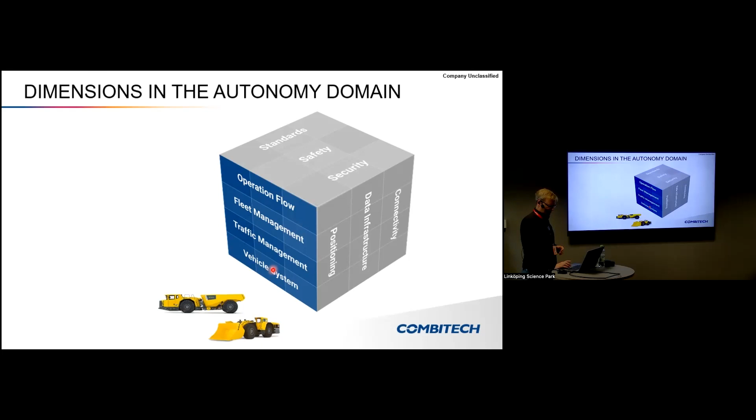And then we have our part. We have been working with the fleet management and traffic management parts, and also to some extent the integration towards the Epiroc safety system, because having those autonomous machines working in a confined area, you need to have a safety system. And Epiroc wanted to give the operators the possibility to easily access the safety system and flexibly change the safety areas where autonomous things can happen.

Between the two systems, the vehicle system and the traffic management system, we have been working with an interface called OPC UA, which is a standardized framework, and Epiroc used the OPC UA framework and defined their interface on top of it. And we did not stop there. We also integrated towards mine infrastructure. For example, if certain areas are not allowed for autonomous machines to enter, like at the crusher if the bin towards the crusher is full, or if a rock breaker is out of parking position and the autonomous machine would damage the rock breaker, then we stop this from happening.

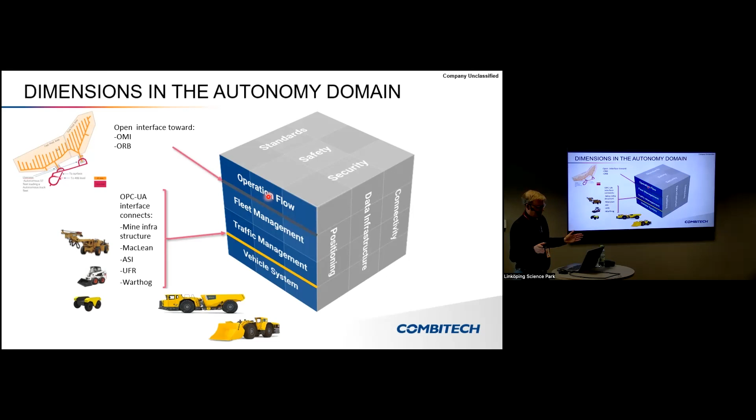And then, of course, we have the integration towards some kind of operational flow or orchestrator of the complete mine. This is mainly controlled by geologists, how the ore body shall be worked on, so that it collapses in a certain, safe way. And here we have had two examples. We have the OMI, Open Mine Integrator, that was a cooperation with LKAB. I will come to that a little bit more. And we have ORB, optimized real-time bogging. This system helps the geologists to let the ore body collapse in a safe way. I will talk a little bit more around that.

So, but that was only one side of the cube then. We see also that we really need to drive standardization in this industry, because it would help the mine operators to have different vendors cooperating in the mine and have them competing with each other also.

Safety, of course, is a big thing in mining, and as I said before, we are still working in confined areas where the autonomous machines are allowed to work, and that helps to not have any dangerous interactions with humans. And it's an important business, so security, of course, plays a role there as well.

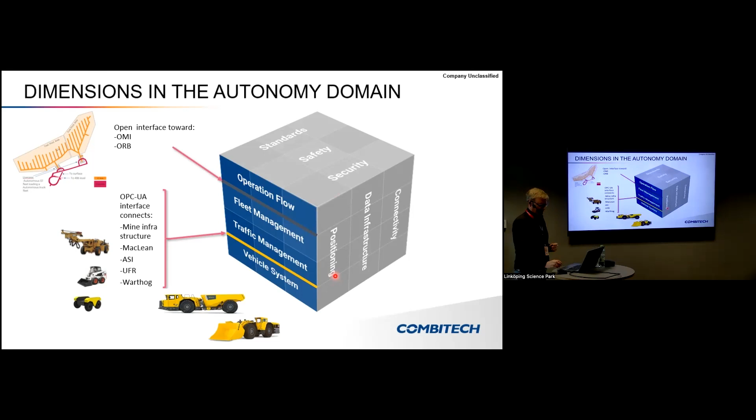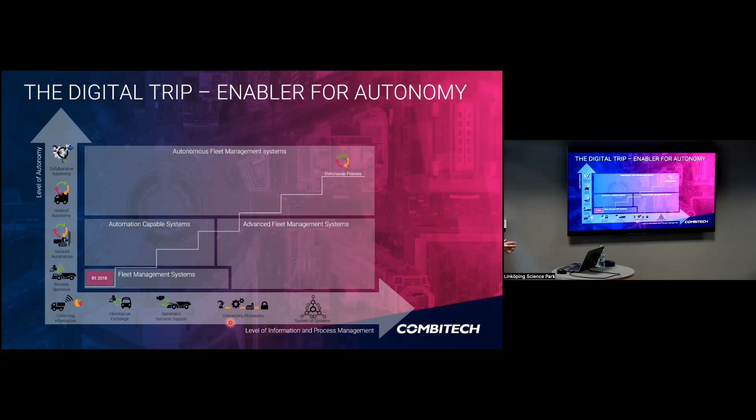So we started off with just two extraction drives for the loaders, very similar to the POC which we did before. And then we went along towards doing it for the complete mine. I will show you the picture later on and also give the demo about it. And that continued for some years. We also integrated, as I mentioned before, the Epiroc safety system to make it flexible how you divide your work area into smaller autonomous areas.

And now we are in the third release of our system, and we approach the situations where we now have interactions between the scooptram, the loader, and the mine truck. So, yeah, we are touching here the autonomous fleet management system.

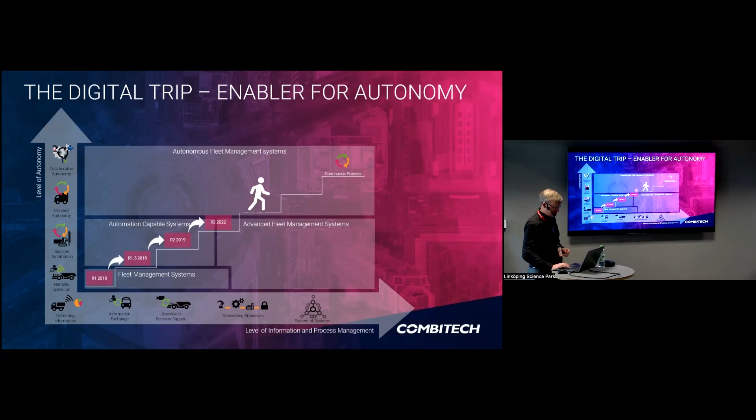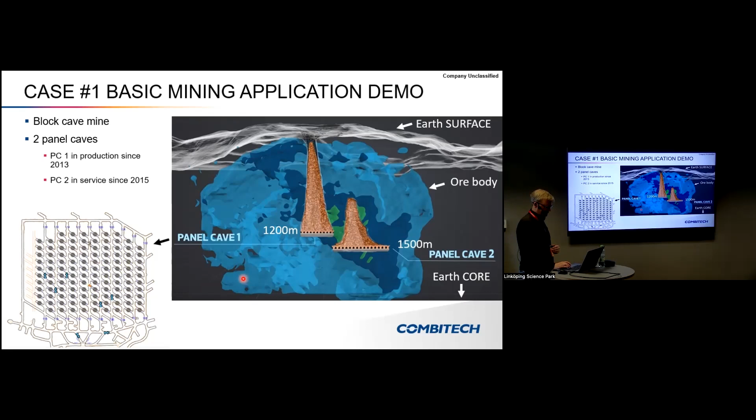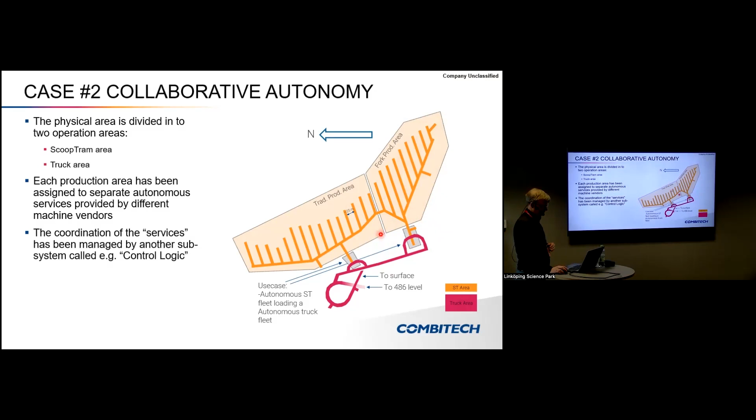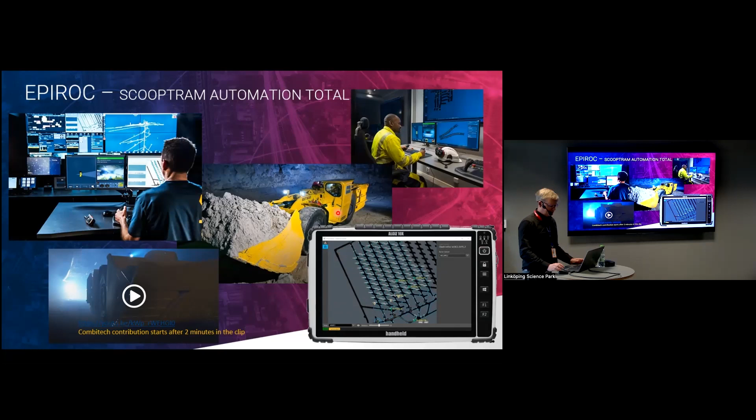Good, and now I would like to continue to the demo. Let's take a look at our application, which we have been working with for about 4 or 5 years now.

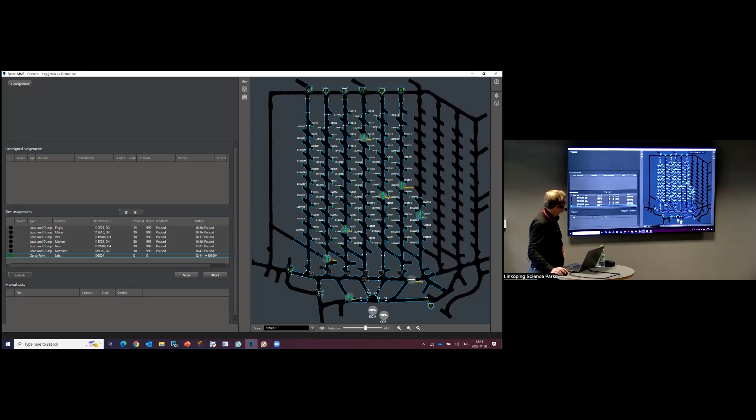What can you see here? On the left-hand side we have the assignment flow. You can create assignments - for example, I can choose Layla here to go to a point. Then I get a create assignment panel with information about the assignment up here. I can choose a destination, create the assignment, and launch it. Here you see Layla is moving, and the orange colored part of the route means the vehicle got access to that part of the route.

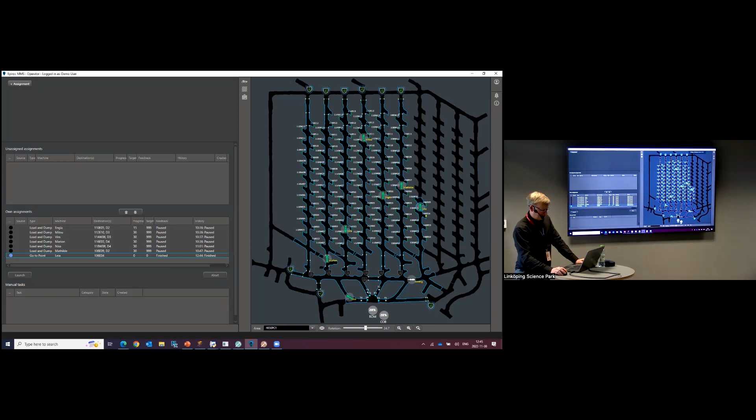In general I have ST18s here, which means they are supposed to take 18 tons into this bucket. I also have a rock breaker, ST14 rock breaker. I will use this vehicle to interfere with the autonomous movements of the machine later on.

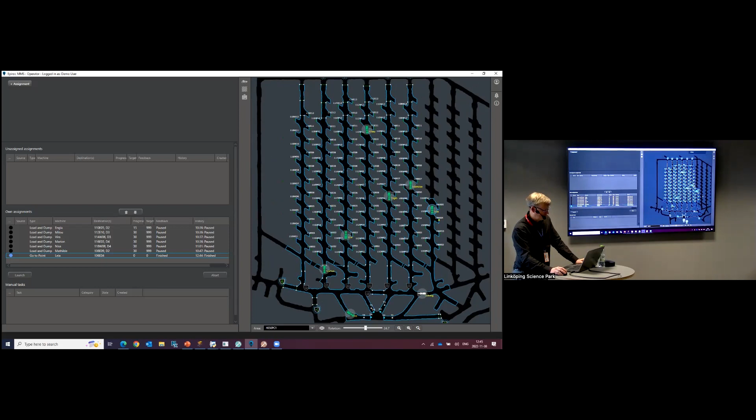So what else can we see? As I said before, we have been integrating our mining management system with the Epiroc safety system. We've displayed here that the safety area is bordered in blue around the extraction drives. On the northern side we have barrier cabinets which function as entrances, so you can check in machines through those light barriers without interfering with the traffic. Traffic can still go on because we have 3 light curtains, so that at each given time we have at least 1 machine length between the automation area and any possible human location.

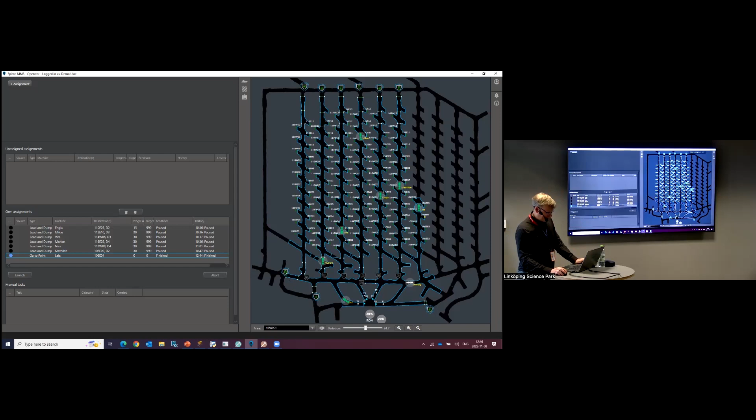We also have barriers which are not used right now in the configuration - they are contained and unarmed barriers.

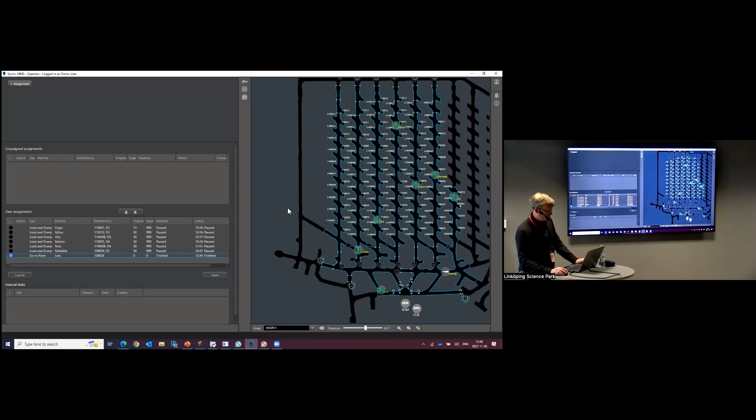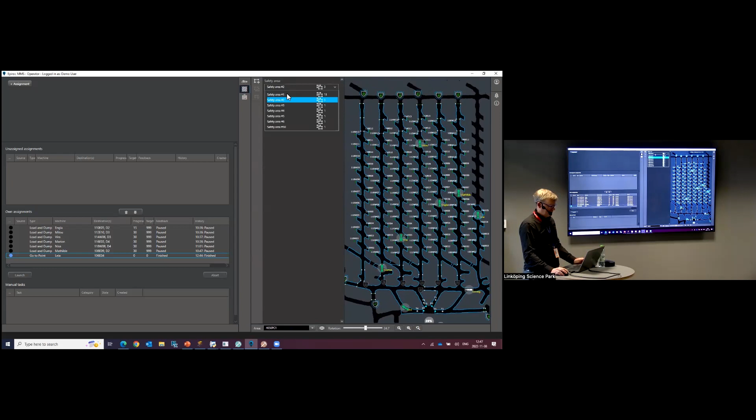I won't show the complete process and flexibility of the system, but let's assume we would like to just have the left-hand side of the mine, or split those into 2 areas. If I choose this one here, the operator gets a lot of tasks to perform before such a change of safety area is possible. Certain machines need to be checked out - all machines outside of the area - because they are no longer under a certain safety area at the moment.

But of course we can then put another safety area on top of them and they can be checked in again. I also need to make sure that machines within the new safety area configuration confirm their position, to really make sure they are where they are, or get confirmation from the operators. Then we also have the information that this barrier, which was a contained barrier before in the complete setup, changes to a shared barrier, meaning on the other side we can add another safety area. I won't go further with it because it's a lot of machines to confirm - it would take too much time.

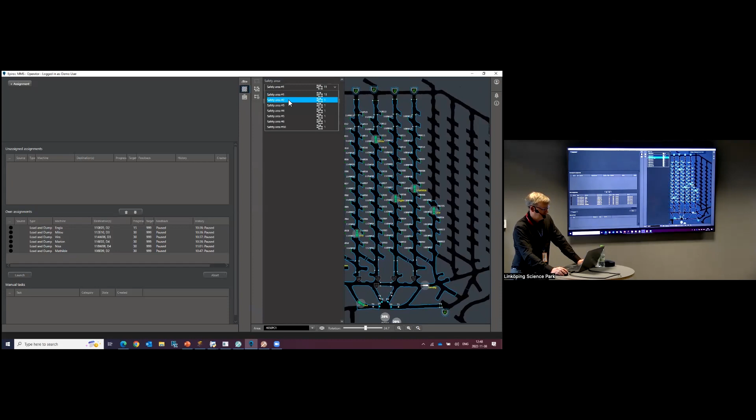If we look at the scenario, I have already taken away the right-hand side, so only the left-hand side is active. I can put over a new safety area configuration over those machines, and then I have split the area in two. Or I can just, for example, if we got stuck at a certain draw point, choose to have a single extraction drive as a safety area, and put in a water cannon or block holder to free the draw point again.

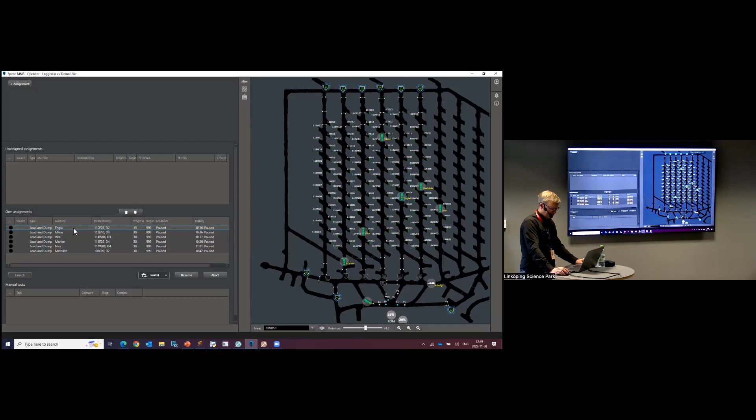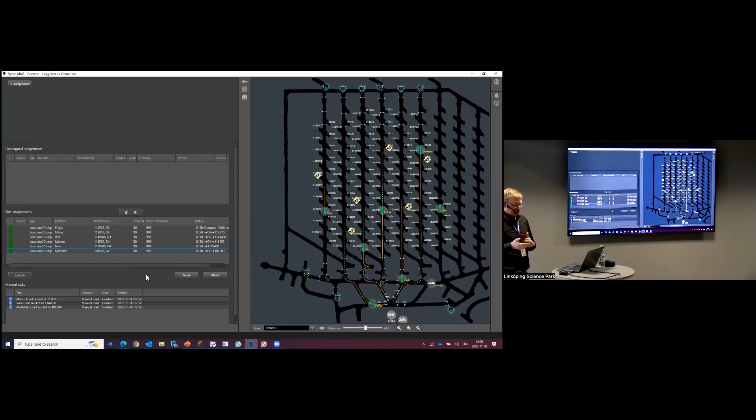I will put away safety areas for display right now, and I will start up all the machines here. You can see the white dashed lines - those are the intentions of where the machines want to go. Then you have the orange solid lines where access is granted for certain parts of the route of the vehicle. I need to add that all the routes are pre-recorded and then commissioned - you start off with a quite slow speed, then raise the speed in steps.

And then you end up with a speed where the machine still can follow the intended route without problems. So a lot of things are going on. We also display your own assignments and the manual tasks.

So that the operator knows something needs to be done here. Now I own all the machines, so it's quite crowded. Usually an operator has one machine, at max two machines.

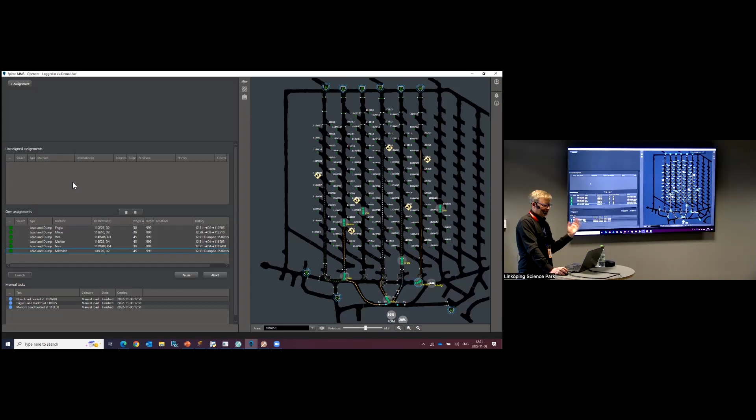And I also forgot to say that if we receive orders from ORP, the overlying system there at Cadia, those assignments will come into this box as unassigned assignments. The operator controlling the machine can take over and assign it, or take on ownership of the assignment.

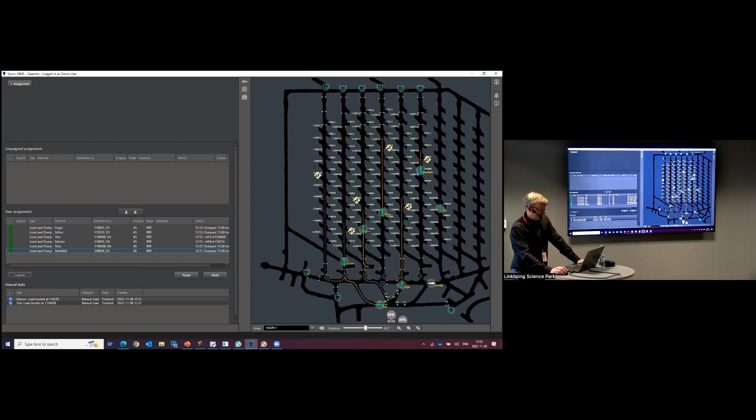And you see at times the machines are turning to white. That means they are operated in teleremote. And if they are in green, then they are autonomous. What you can't see is if they are orange, mainly outside of the automation area here, then they are driven manually.

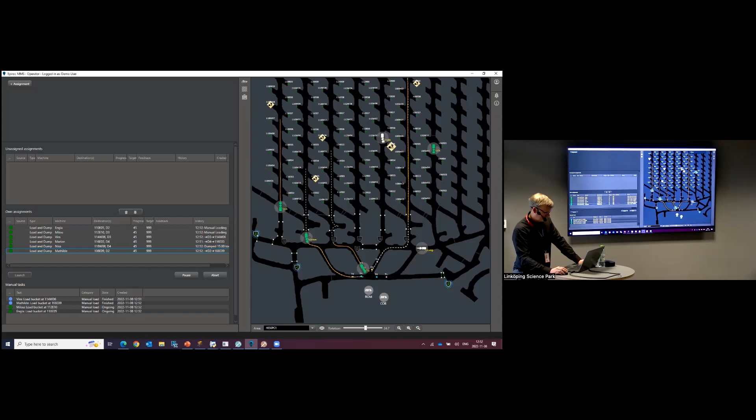So if I now try to interfere a little bit, I need to wait until the machine is down here. Okay, I can, of course, start. So that you believe me that the machine will stop, like this.

What we realized quite early is that we not only developed the application you see, we also developed a complete mine simulator, and a simulator of the operator station, for example. The mine simulator can be seen here, so that's what's going on in the mine. We also have the possibility to interact with the barrier cabinets in the simulator, because we realized that to really test the processes, and also for educational purposes, it's very much needed to have the simulator at hand, not only for testing.

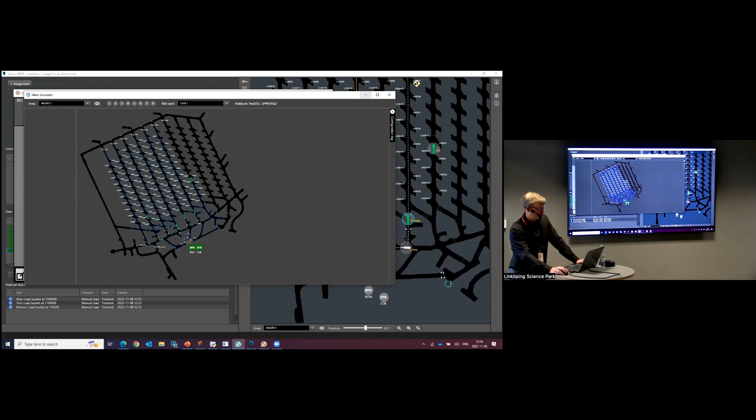So now both machines are stopped because I have entered here the shared traffic zone. And I can move out then. Again, switch direction. Going backwards is a little bit more difficult because it's all the other way around. And then the first machine starts to enter, and then the second.

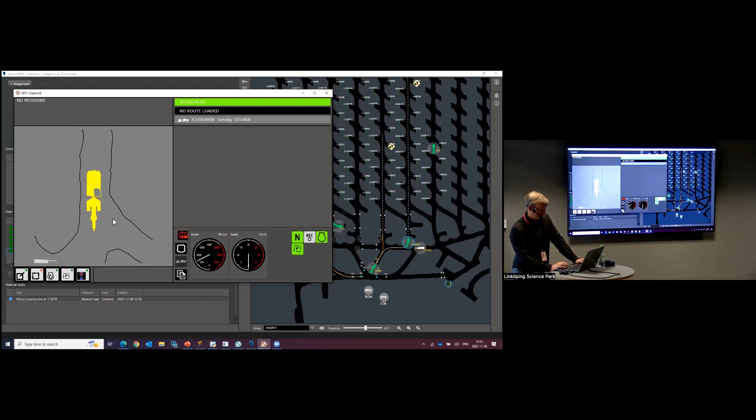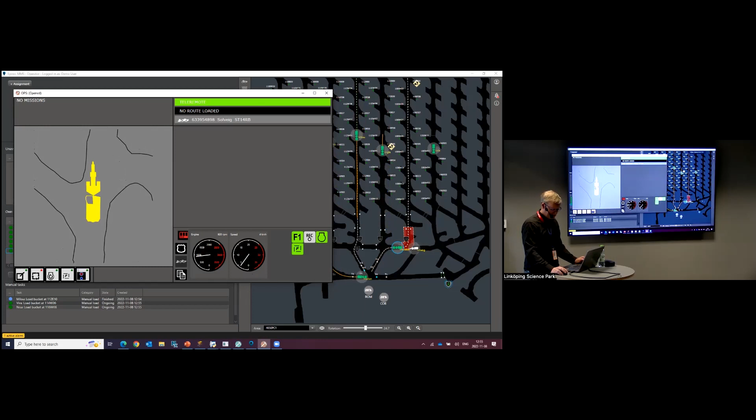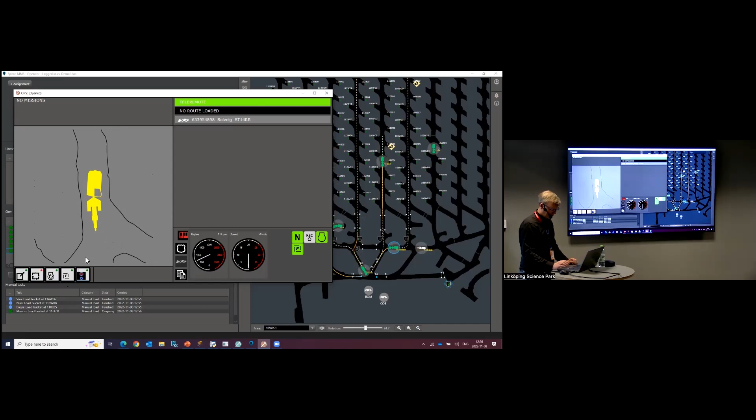And now you see I have entered the traffic zone, the same as the other machine is in here. And then we get a zone conflict, which then stops the other machine here. And I removed myself from the shared traffic zone, and then it all continues again.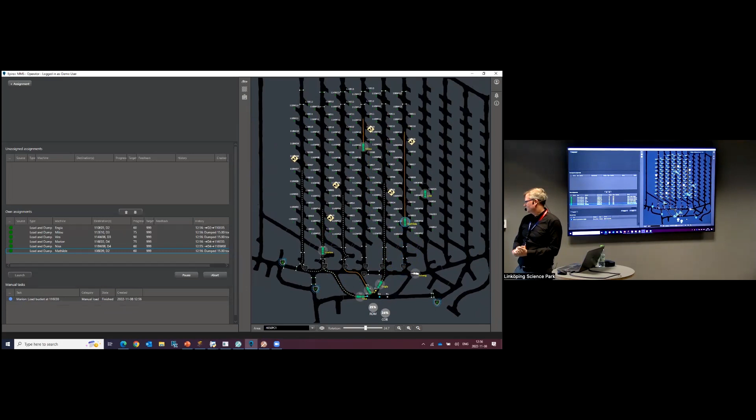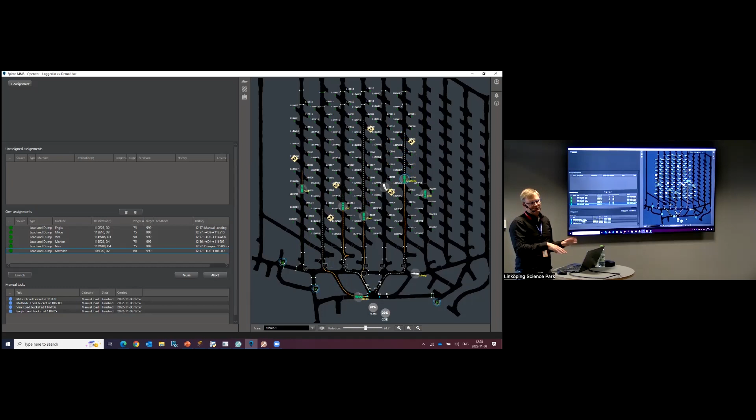How much of the control is made actually in the vehicle, and how much is done via the management system? Does it have a constant contact for every movement, or does the vehicle manage itself, for instance, to avoid collisions and so on? So what we did, and what is represented by those orange lines, is that we have a conservative approach. We tell the vehicle it is safe to go until a certain point. And even if the management system would go down, the vehicle would go until that point.

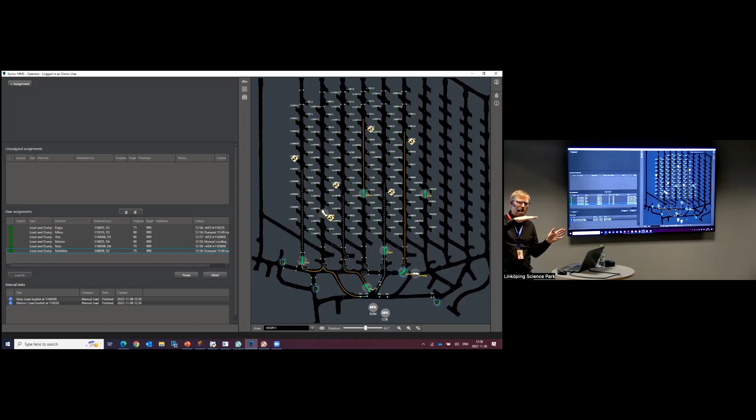How do you track the assets underground, and how do you communicate to the machine in real time? The tracking is by LiDAR sensors, so you get a local interpretation of the position, and that is also saved in the routes which you pre-record. Then you get more or less a fingerprint of the walls of the vaults of the mine, of the extraction drives, which is then used to localize or position the machines towards a global map, which is mapped.

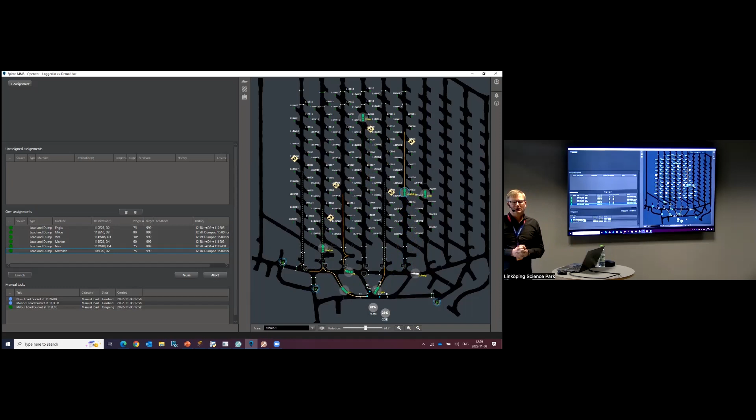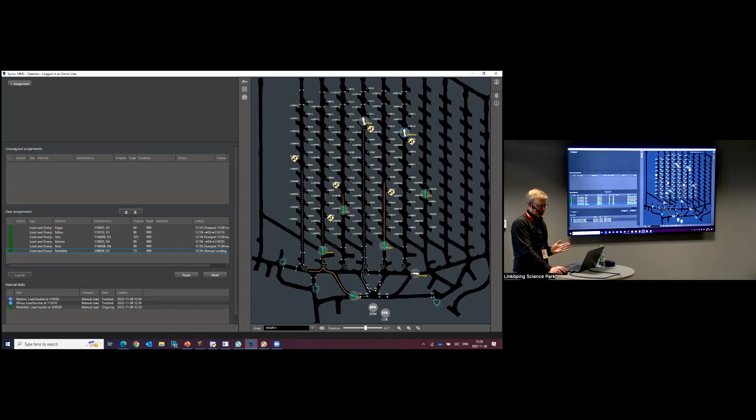What about the communication? The communication is through Wi-Fi towards the machines. And there were a lot of problems because you have Wi-Fi access points down below, in the southern parts, and also up here. So when the machines are in the middle of the drives, the radio coverage is poorest, and you need some kind of handover in this area. It was a lot of hustle to get the quality good enough to have continuous operation. Thank you.